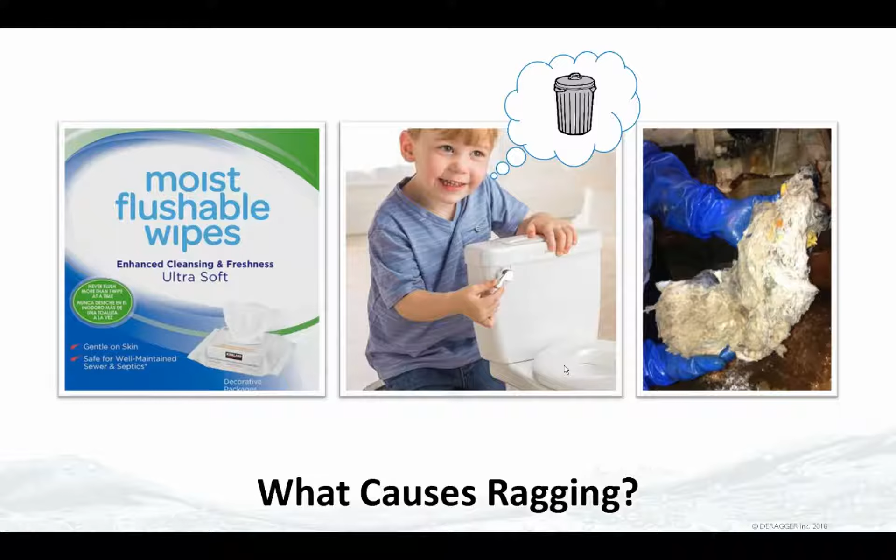So there's all kinds of things that can go in the toilet, but only certain things belong in the toilet. You know, I've heard people say the 3 Ps. I once asked my scout group that question. Of course, I had to bring wastewater into the scouts, and somebody chimed in and said, "There's a 4th P, and that's puke." So now I understand there's 4 Ps that belong in the toilet.

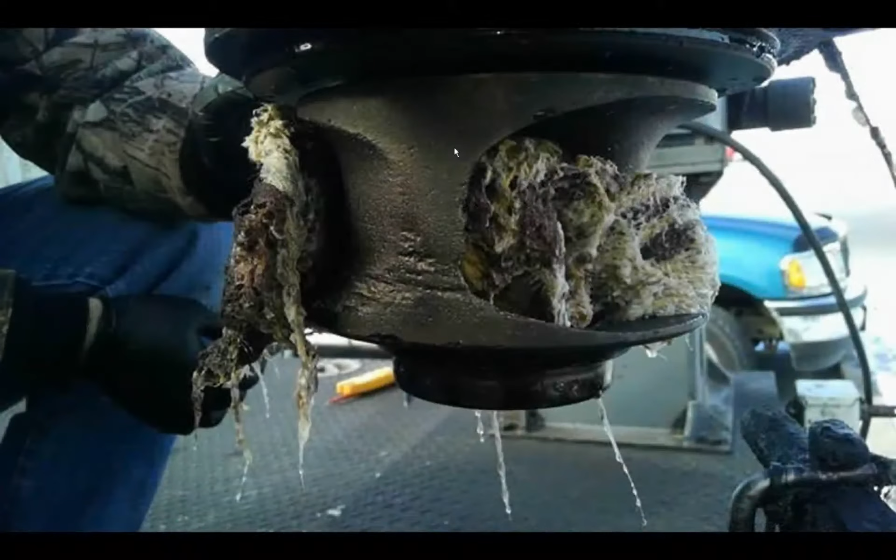So the impact of clogs. Many of you suffer the impact of clogs, be it clogging of the impellers, causing floods and surcharges, causing damaged motors and pumps. But the impact is clear. It isn't something that's nebulous and buried in the statistics. It's hard, it's real, people touch the impact.

One of the impacts that is hard to quantify for a lot of people is energy usage. Many agencies and districts don't track their energy usage in a pump station as they probably should. Pumps have been reported to be the #1 energy user in the USA. You're pumping water from rivers and creeks and power plants and water plants and wastewater plants. And any fraction of a percentage saved in the conveyance or pumping of water is a massive savings of energy.

An engineer might design a pump station to operate at 90 seconds, when in reality, because of the problems within the collection system, it may actually run for 3 times that amount of time, as well as drawing far more energy and pumping less because of clogs or head or another reason. So there's the ideal flow curve, and then there's the reality flow curve. And whatever you can do to change reality to give it an improved flow, the better.

So you might have, oh, there's my dog barking now. You might have $4,800 a year in pumping costs, and in reality, it'd be about $10,000.

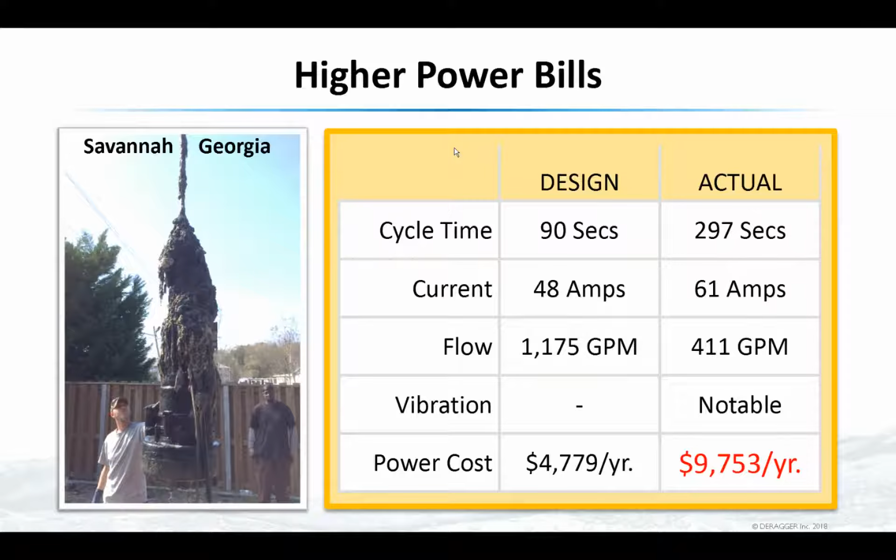Another dramatic effect of a ragged pump is the pump will not run smoothly when it is ragged up. It'll tend to be imbalanced, vibrate, draw more current and energy, and those have lasting effects such as making your windings heat up higher in temperature, and that'll reduce the life expectancy. Your bearings will require replacement more often, and your seals can actually leak prematurely, causing pump failure or worse, even motor failure.

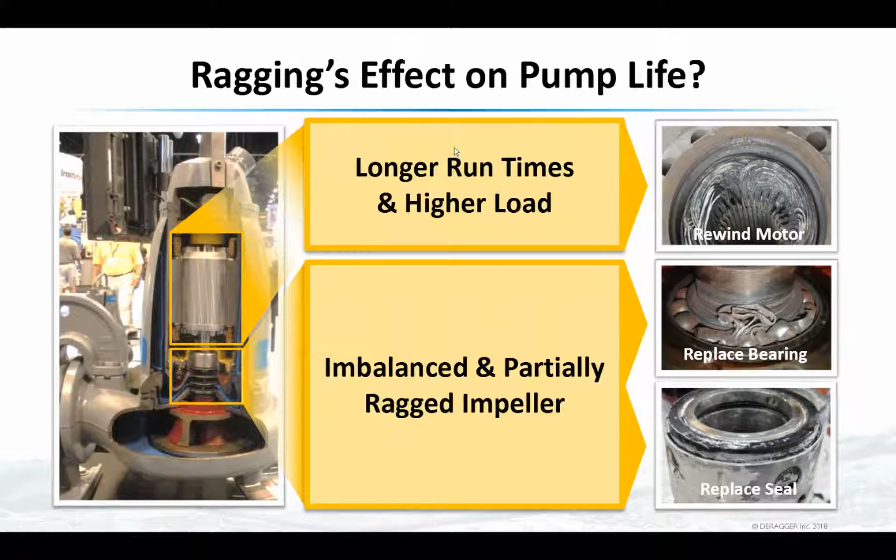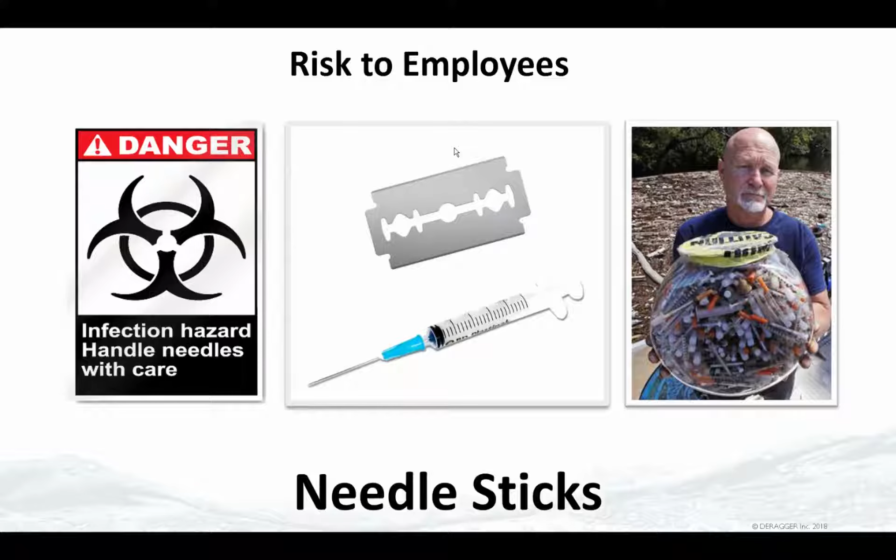Safety to your employees who are required to go out and clean a pump because it's not pumping efficiently. So needle sticks or other sharp objects are a danger. Physical injury, whether it's to a back, even stubbing your toe, dropping something or a wrench on your foot, let alone getting injured by the pump. So injuries are probably the highest risk factor as far as cost is concerned to having a clogged pump.

Biohazards. Well, we all know about biohazards. Hepatitis, and there are even studies that show that COVID-19 exists in the sewage, albeit at lower strengths. But biohazards of all types are in the sewer system, and collection systems guys know this. They don't need to be told this.

EPA and fines, and also damage to surrounding homes. You know, you have a leak, that's a problem. So the cost of repairing somebody's basement or first floor because of a pump leak can be very expensive, into the thousands, if not tens of thousands.

So where are you typically wasting money? Well, the biggest potential costs of having blockages could be injuries and lost time because somebody got hurt, fines, or costs to repair homes. And then we get into the man hours. You know, there's money associated with that, wasted energy, and then pumps and repair parts for those pumps. And at times, wasted energy can even be greater than the man hours, depending on the size of the pump and how much water is being pumped.

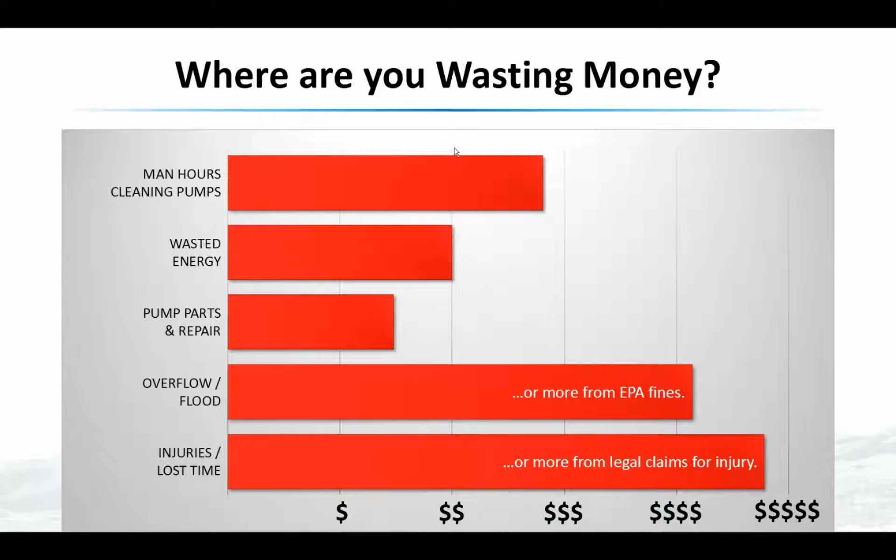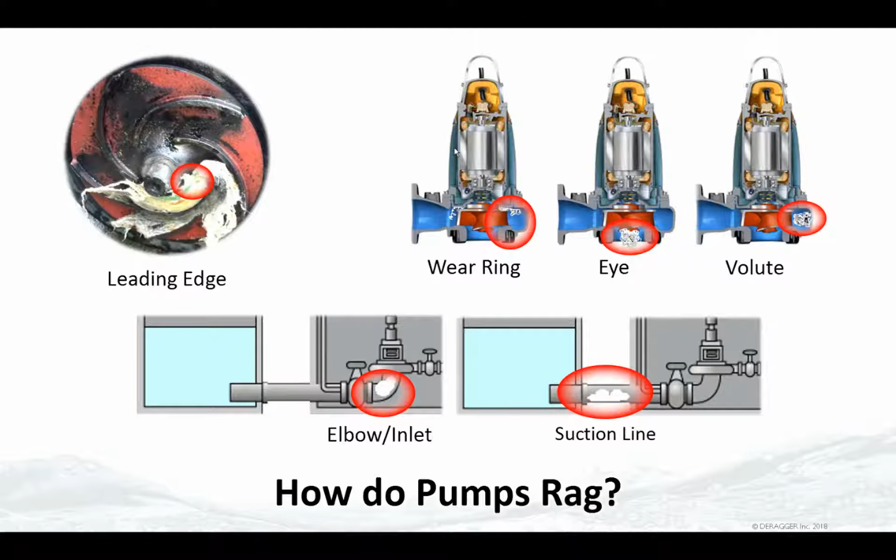So how do pumps rag? A number of different ways, and it's really where do pumps rag? In the wear ring, in the eye, in the volute, upstream, downstream. There's a number of places where a pump could rag up, or a clog could happen. You see the graphic there on the top left. It's essentially the leading edge will capture a rag and start capturing one, and then two, and then three, and then it goes on from there. So the idea here is that we want to prevent these things from happening like this.

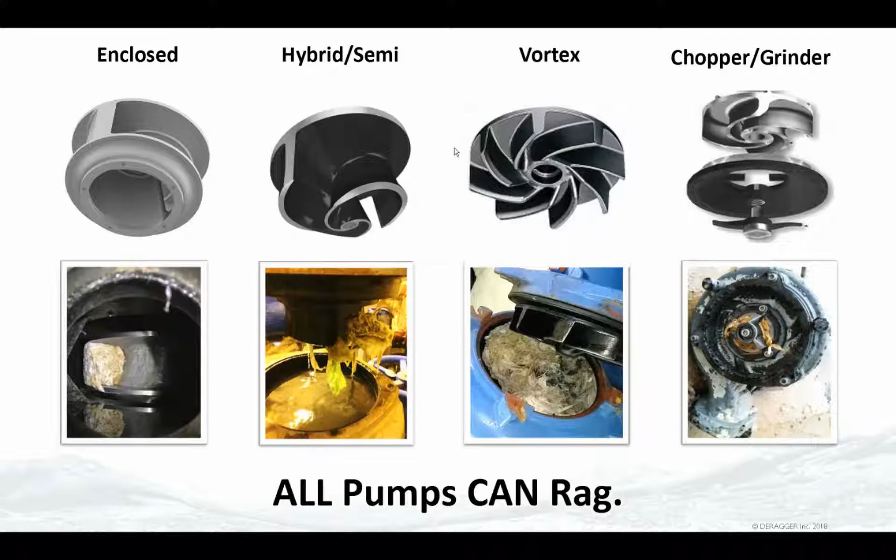So what types of pumps can rag? Every type of pump can rag. It depends on how much they rag, and as soon as they start ragging, they become inefficient. So a ragged pump is not an efficient pump.

Any questions? All right.

Let's keep going. All right, so what are your options? I painted a very sad picture of what could happen in your lift station and what probably does happen in some of your stations. You have a few options on what to do with that debris as it comes into a station. You can grind it. You can get all types of grinders to grind the debris before it gets to the pumps. You can change your pumps into a different style or a different blade or different impellers. Chopper pumps, for example. Or you can, what we say, pass the debris.

So you don't really necessarily need to get rid of the debris. You just force it through the pump in such a way where you're not causing a blockage, but you are allowing the debris to pass through a pump.

So a chopper pump or a grinder is a piece of hardware, which when the flow comes into a grinder, it macerates the material. So if a rock comes in there, it just grinds it, or a piece of wood, or sticks, or baby wipes, or whatever, and it's constantly running and grinding it up into small pieces. Similar to a chopper pump, it chops it into little bits and pieces, similar to the graphic at right. Essentially, it just grinds it up into little pieces, and it's easier to pass that way in those two options.

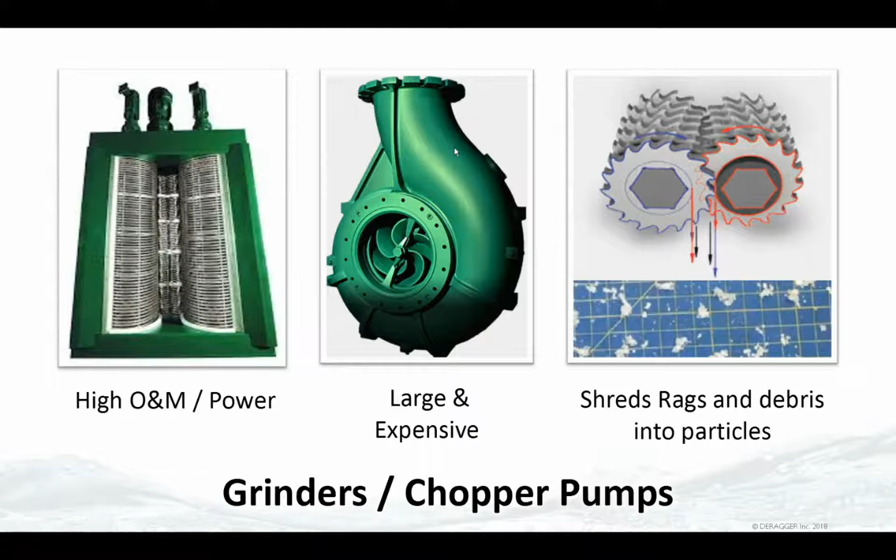So, but the result of grinding is it will grind it into small bits and pieces of pulp. And so what happens after cutting or grinding is it will end up going to the bar screens at the treatment plant, and it may not even get caught. It may even go through that, and then now you're affecting the process within the wastewater treatment plant.

Sure, the collection systems guys, they say, well, it's not on their problem list anymore of having debris in the pump station. They're running, but now the treatment plant is having to deal with these small particulates within the plant. So they often will pass through screens after being ground up into small little pieces.

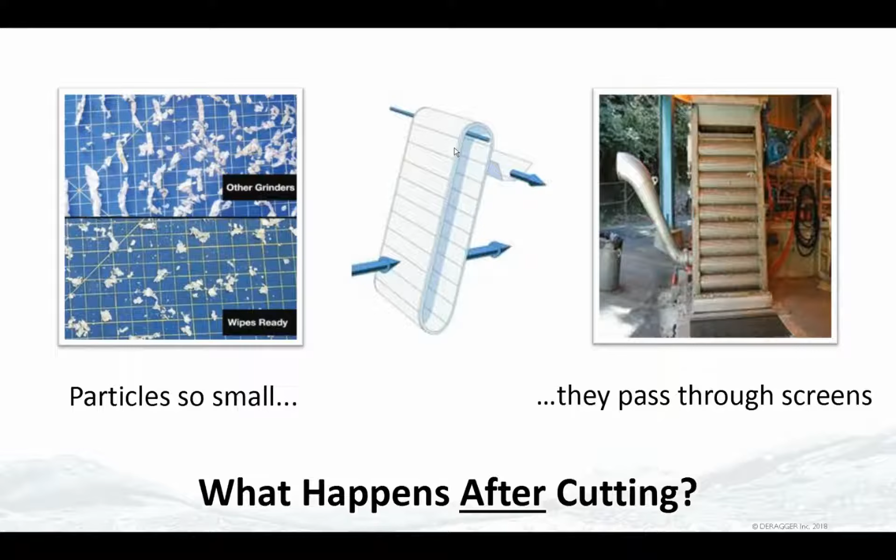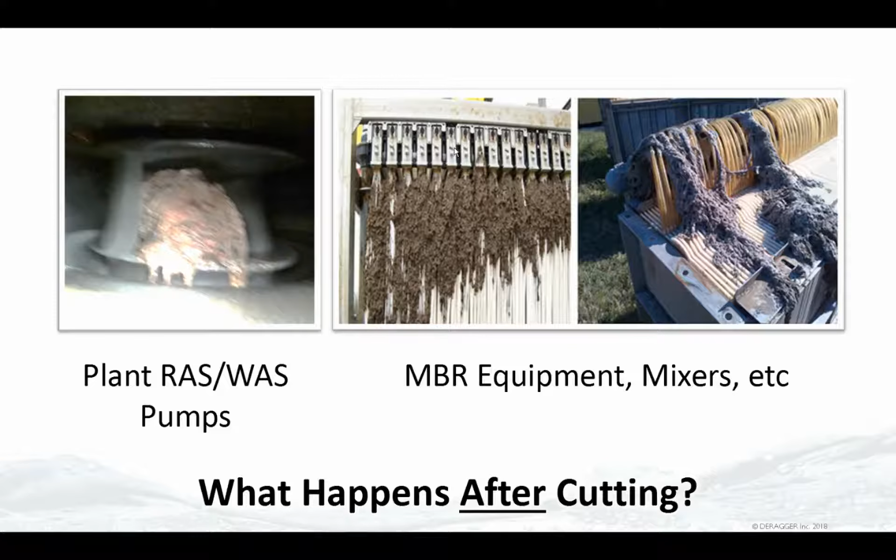And here's some graphical examples of what that looks like in the headworks of a treatment plant. It's sometimes mop-like, sometimes stringy, sometimes just like oatmeal. It will just pass through. So after cutting in the collection systems, you may or may not be able to grab some of this or collect it in the headworks.

The Deragger itself sits in the back of a panel and constantly monitors your pump for the potential of a blockage and initiates a cleaning sequence on startup when it detects that the pump might be clogged.

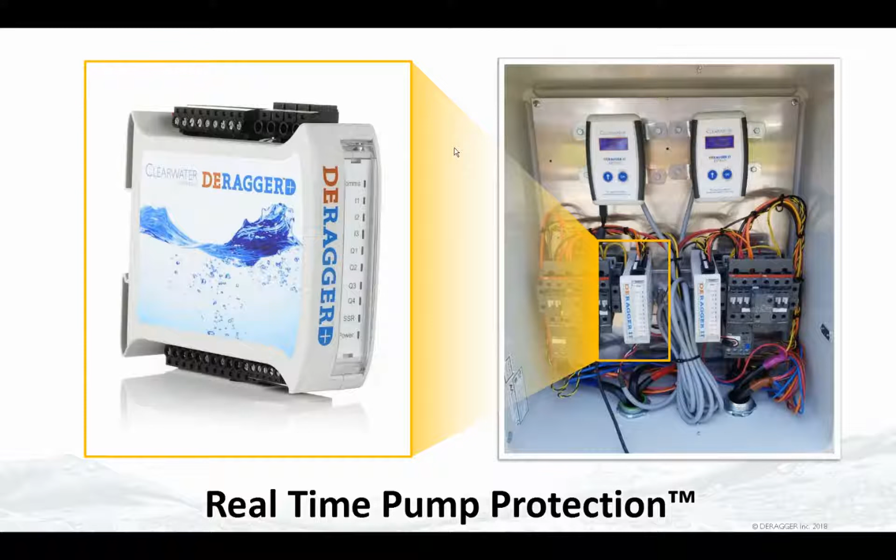So how does that work? So in real time, we measure the current and the voltage in a pump, and we calculate power on each of the three phases. So as we monitor the phases, we can make a determination as to whether the pump is clean or getting dirty. Now, just a quick note here, this only really works on three-phase pumps. There are some means of changing some pumps for this to work, but really a three-phase pump is where this device actually works best.

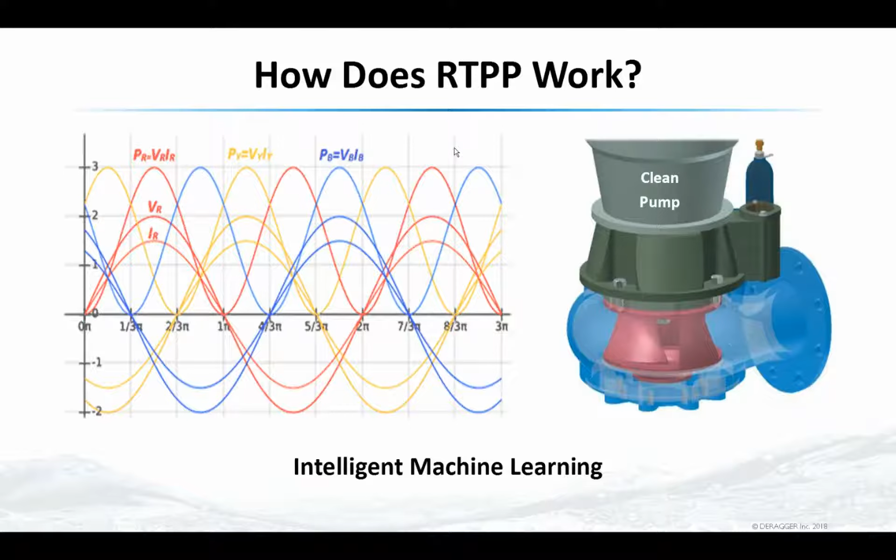So if your pump was linear and uniform, it would be pretty simple to say, hey, anytime my power goes over a certain level, let me know that there's a problem, or if my power gets reduced, let me know if there's a certain point. And it could alarm and trip and have some sort of action based on these two things. But in reality, that's not how a pump operates.

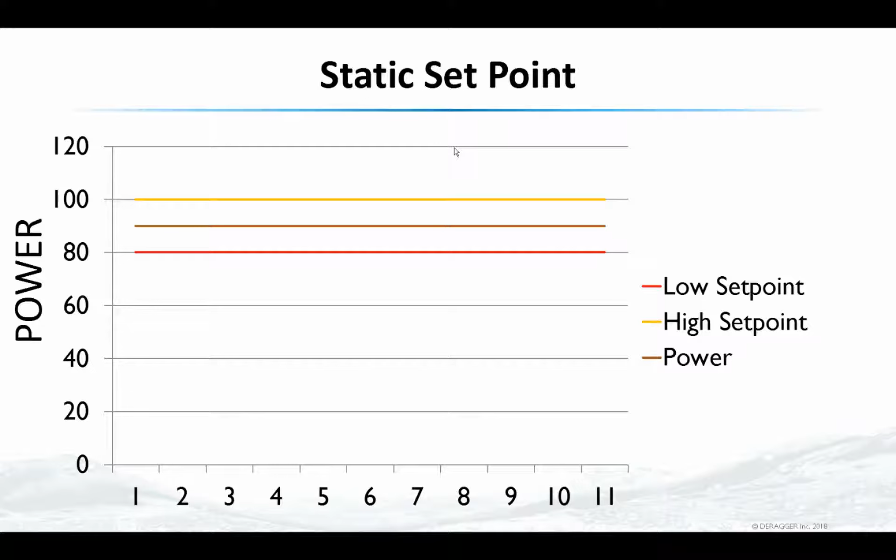A pump operates at different frequencies oftentimes with a variable frequency drive, or on startup and winding down also. So it's a little bit different in reality, and that's what's different about the Deragger product: it can actually calculate the power usage at different frequencies. So it's like having multiple set points at different parts throughout the range, and calculating whether the pump is in nominal, normal circumstances, or is above or below.

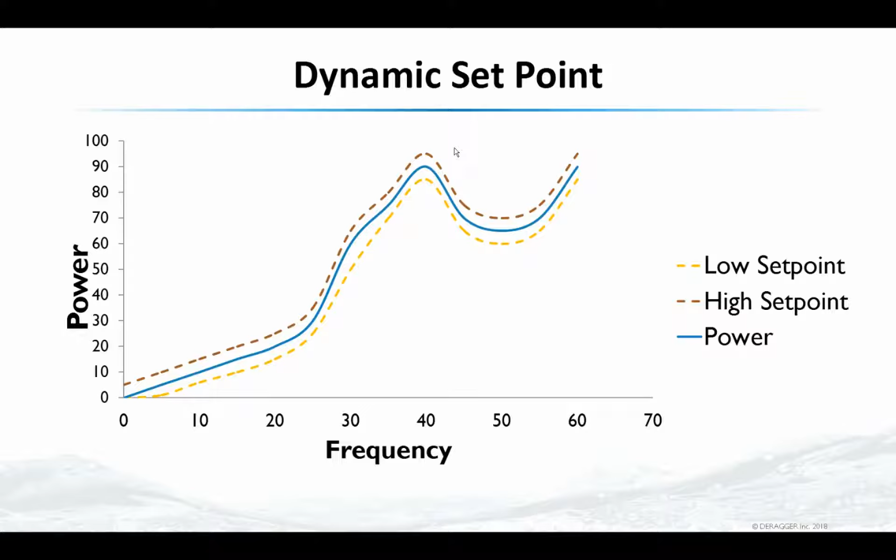So if the pump is just spinning in place, you might have low power requirements. And if it's clogged, your power usage is more. So the ability to measure torque and how much energy is actually used is key with this device over an entire range of frequencies.

So how does a clog happen with respect to the Deragger? What's the decision process, if you will? So a pump is told to turn on. The Deragger then monitors the power requirement and torque and determines whether it's within range or not. So if it senses that, oh, I have 1 or 2 or 3 baby wipes, just enough to get it to trip, it will then stop the pump, tell it to reverse for a couple seconds, stop the pump again, and go back and try pumping again.

If it finds that the torque and power usage is nominal and within the normal range, it goes back to what it was doing, and it's waiting for the next call of the pump to start. So it resumes in what's considered a clean operation. If it finds that it's still dirty or beyond the range, it will initiate another cleaning cycle up to a maximum that you choose for your station.

If it's not able to clean it, then it will trip an alarm, and your SCADA system will tell you, unable to clean this pump, somebody please come out here. And there could be something giant in there. It could be a 2x4 that it just can't pass, or a chain or something mechanical. What you don't want to do is keep trying to pump with a 2x4 stuck in your pump station.

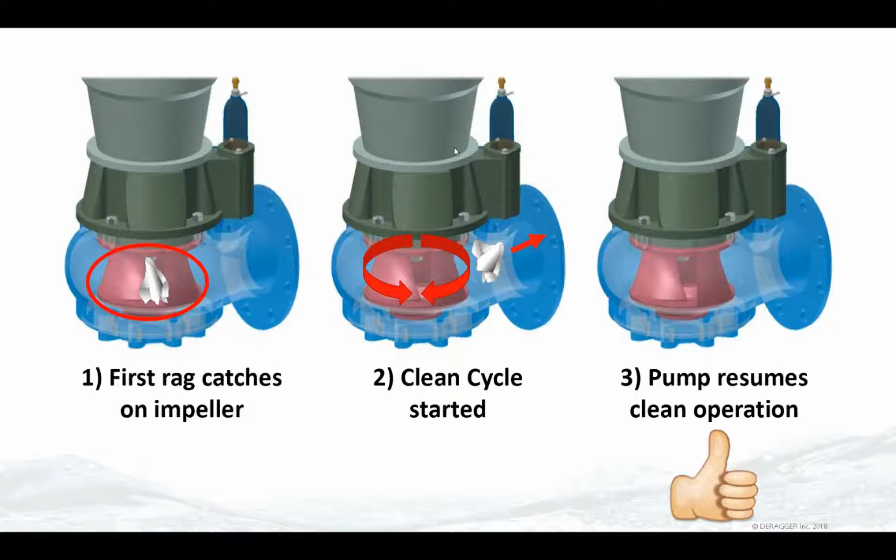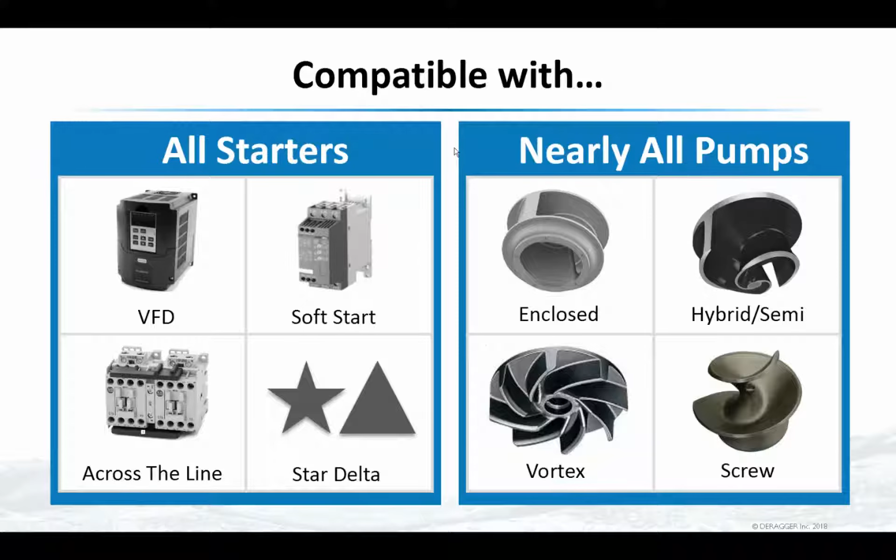So what is this device compatible with? The Deragger works with VFDs, soft starts, across the line, all types. In fact, I think it probably works best with a VFD myself. What kind of pumps? Just about any kind of pump: enclosed, hybrid pumps, screw pumps, chopper pumps as well, vortex pumps.

Now, some people ask, well, can I reverse my pump? Well, we have letters from a number of manufacturers who've shown that, yeah, you can reverse it, and this is what you need to do to ensure the safety and the integrity of the pump. It's been a long practice for a lot of old guys in the field to mechanically switch the wires around and temporarily reverse it just to clear out some blockages, and this does it automatically.

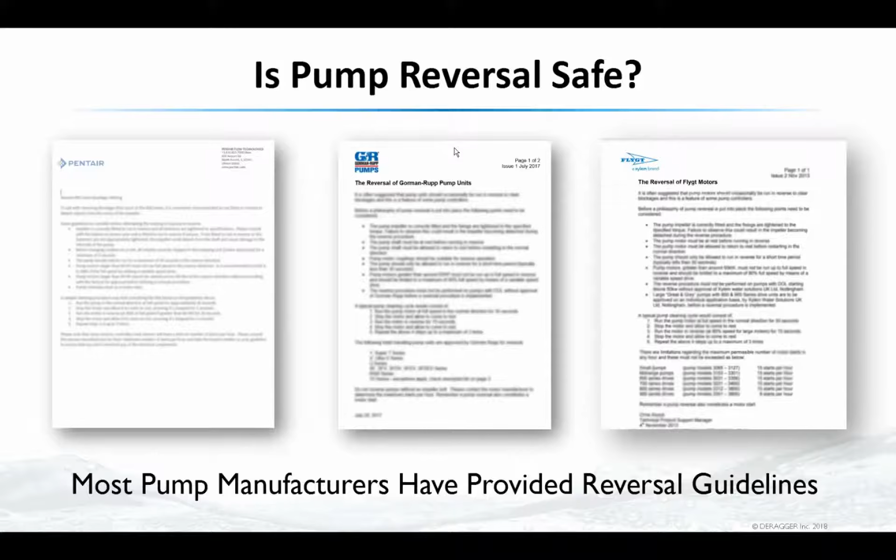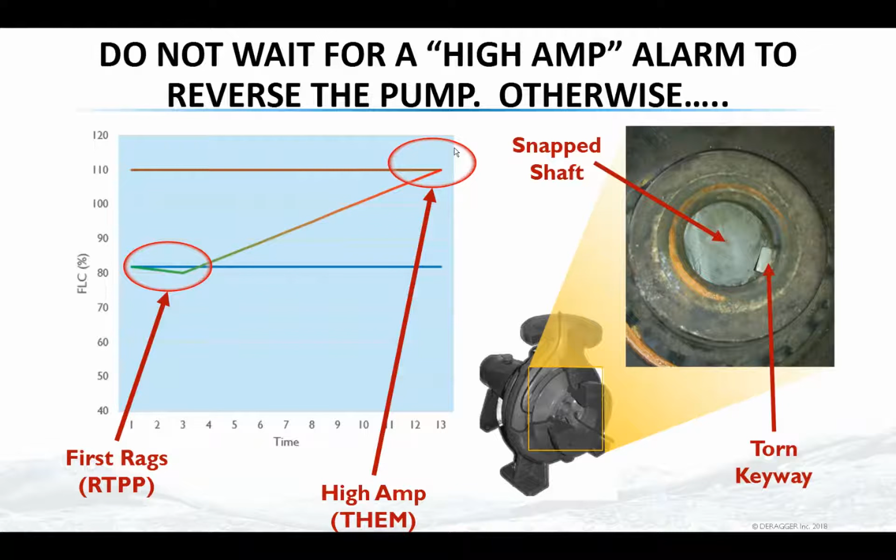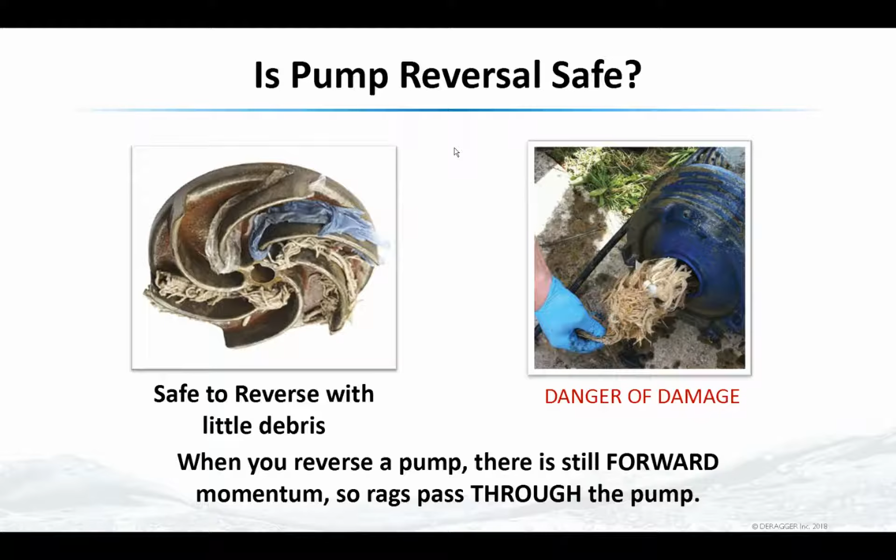So again, it's the same as the previous slide. You don't want to reverse a clogged pump. That's a problem. But before it gets clogged, with 1 or 2 wipes, then yeah, you can get away with that, but not at all when it's completely clogged.

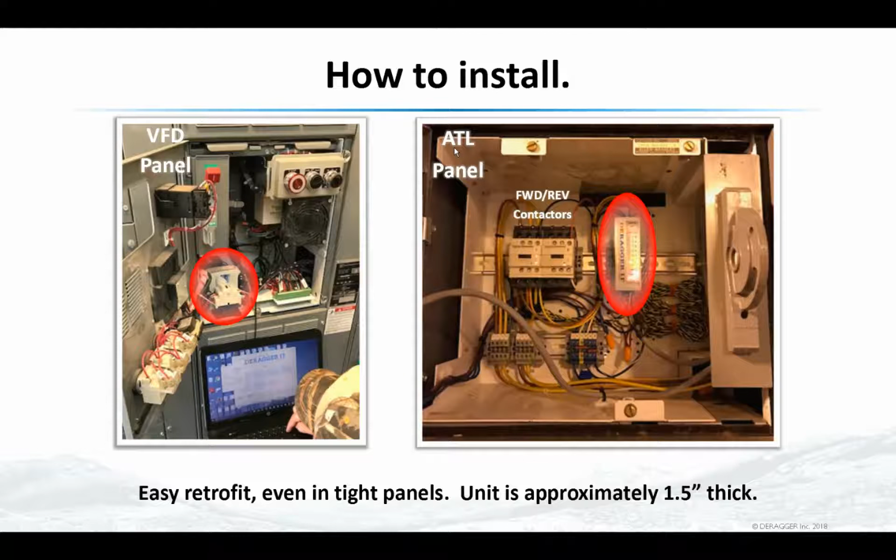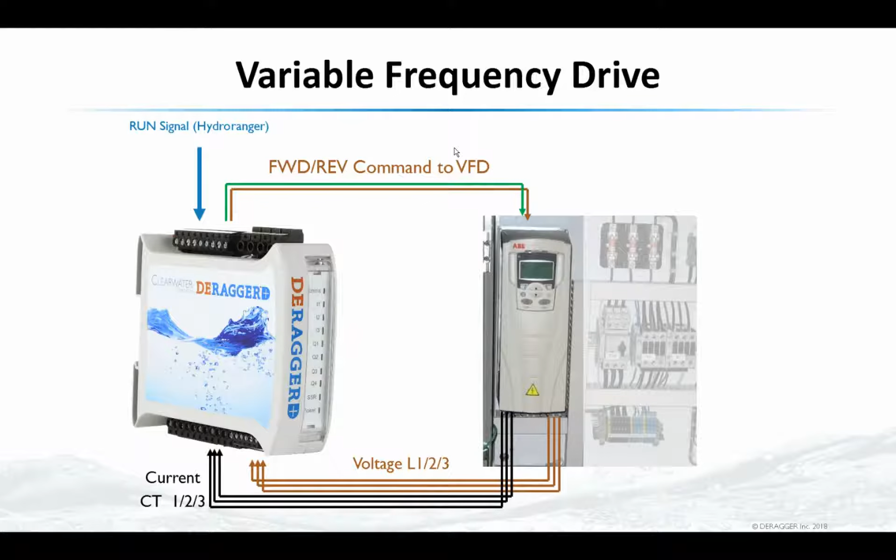So here's some of the wiring, if you will, for a VFD. Your run signal coming in from a device such as an ultrasonic, a surge pressure, a Hydroranger, will tell the Deragger instead of the VFD to start the pump. The Deragger then tells the VFD to start it, and if it finds that the current and voltage and calculated power is not within the normal range, it will tell the VFD to go into reverse for a second and then go back to normal operation. So this is really simple wiring on how to do the VFD.

Across the line is a little bit different because you do have to add a secondary starter for the motor. And you need to have a little bit of space, or a lot of space, depending on the size of your motors, in your bucket to do this. You may have to have a panel on the side of it, but the gist is the same depending on horsepower. They all get wired the same. Signal comes in to the Deragger, tells which starter to start, whether it feels it's clogged or it needs to go in reverse, or just normal operation.

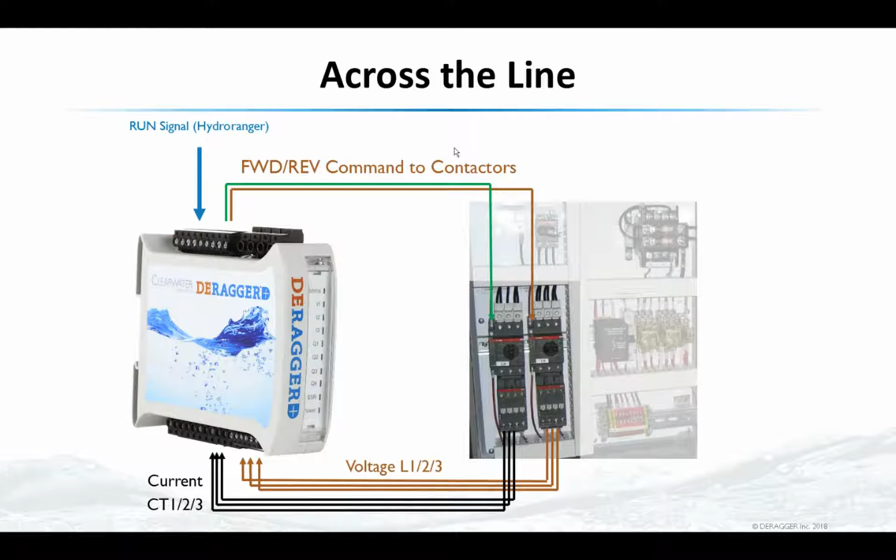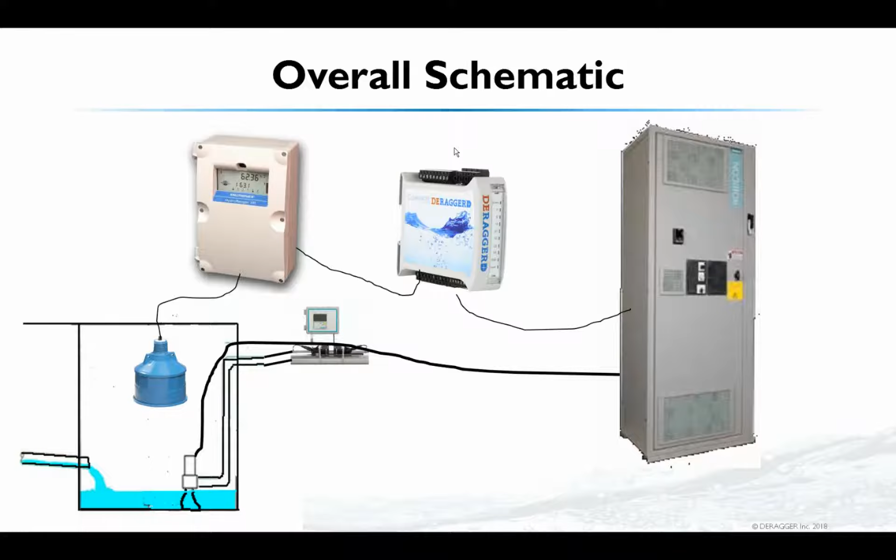I'll stop here for any questions. If anybody has any questions on that. It's all quiet. Is everyone in a lunch coma?

Okay, we'll keep going. So what do you get with a package? You get the software, you get the Deragger, and you get a keypad. And the benefit of all this is not only do you have the deragging capabilities, you have the ability to log and save all of the data, such as run times, how many times it had to initiate a cleaning sequence. You have your ability to track energy usage in kilowatt hours. So now you have on a memory card, or the ability to download memory into a laptop, your full functionality. It also has a USB port so that you can download data via the USB cable into the software.

Oh, did somebody have a question? All right, never mind.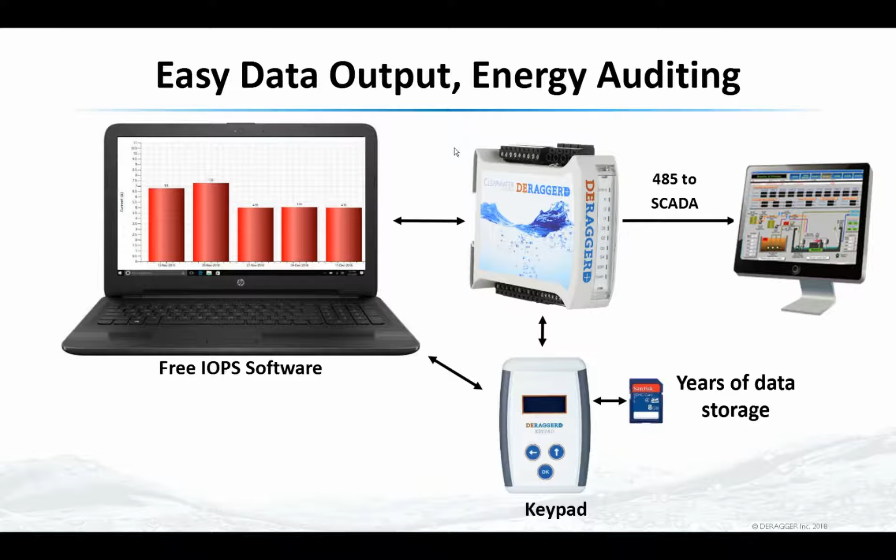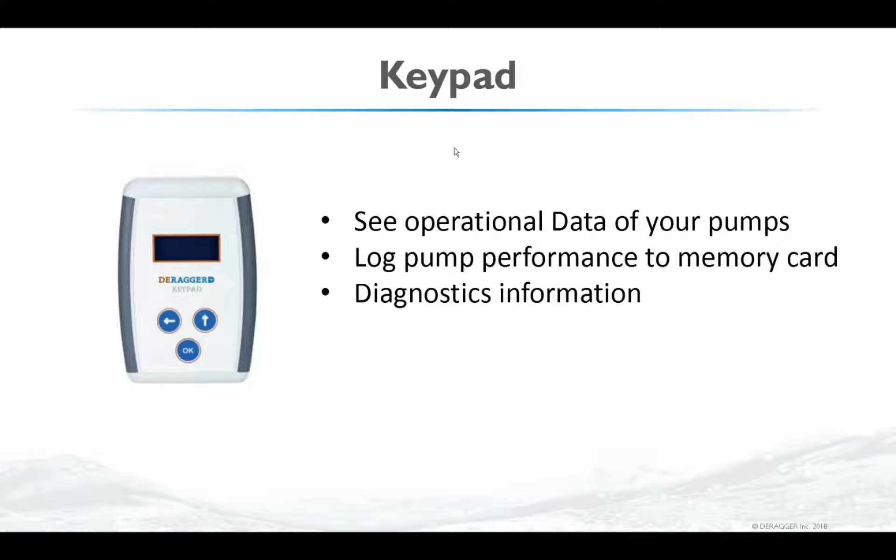The keypad has a number of functions. You can see the operational data of your pumps, starts, stops, how many times it had to do a pump cleaning cycle, energy usage, and any diagnostics information. So this sits on the dead panel in the front, so you don't have to access the electronics in the back.

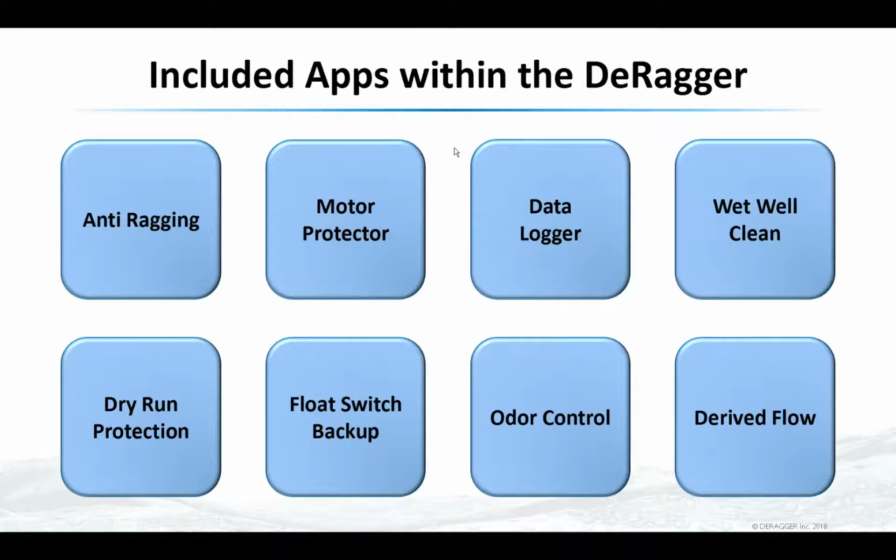Included within the DeRagger are what we call apps. And there's a number of functions with these apps. Anti-ragging is the standard default for the basic Deragger. Motor protector, data logging, wet well clean cycle, dry run protection, float switch, odor control, and what we call derived flow. So it can actually calculate flow on non-VFD applications, as it's pumping up and down. So what are some of these things? I won't read this verbatim, but anti-ragging is the functionality of keeping the pump clean. Energy monitoring and data logging allows you to track your voltage and current and power on each of the phases and energy consumption. Motor protection: overload, imbalance, overcurrent, undercurrent. Built-in data logger.

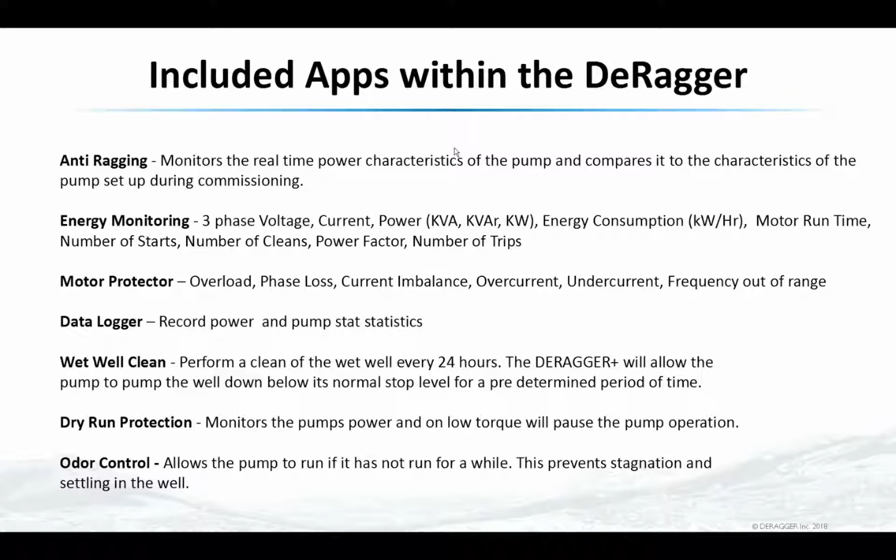Wet well clean is to pump down the wet well below a certain level. Let's just say every 24 hours at midnight you want to tell it to pump down to 10 seconds beyond the set point. It'll do that. Dry run protection to prevent an operator from leaving it in run and then just driving off. And then odor control for those stations that maybe don't pump very often, over the weekend as an example, and you don't want it to stink, so it will pump out whether there's a high set point or not. It'll pump it down to try to eliminate some of the potential for septic water.

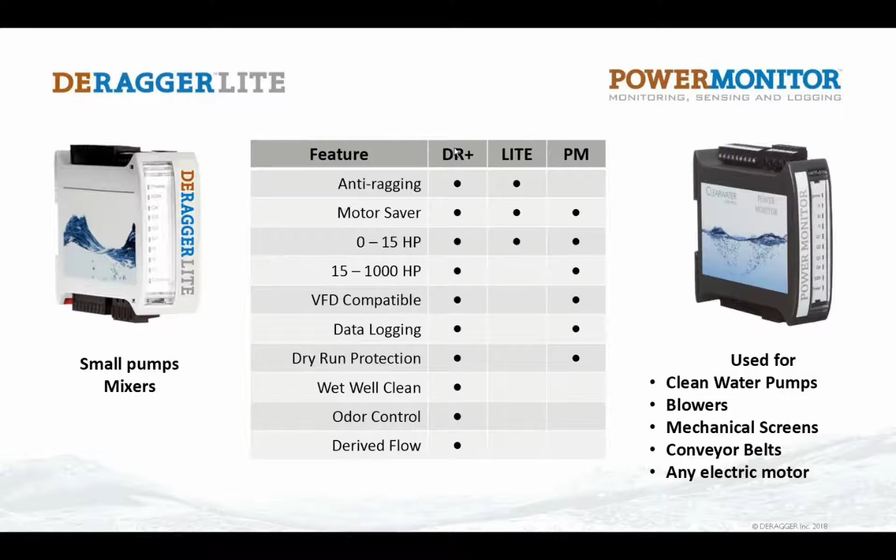So there's three models of the DeRagger. There's the DeRagger Plus, the Lite, and the Power Monitor. The Deragger is the full-blown unit for all horsepowers and all of the apps, if you will, built into the unit. The Lite is for the smaller pumps and doesn't include VFDs or data logging or any of those features. And if you don't have any ragging problems and you purely want to just use it for doing power monitoring, we have the PM version, the Power Monitor.

Okay, so we have a question here. If the VFD is using communication network type commands for run stop, then does this support industrial network protocols like Ethernet IP, field bus, etc.? Jordan, you want to chime in? Yeah, so it needs a hardwired run signal to be able to tell the DeRagger to start and stop. There are some ways around it.

Sorry, my dog's acting like a lunatic.

But yeah, so we do have the capability of talking Modbus TCP, but still, for the DeRagger to receive a run signal, it needs to be a hardwired run signal instead of, say, Ethernet IP or something like that. That makes sense. Do we read the current and voltage from the VFD via communication protocol, or strictly the CTs in a connection? For the DeRagger, it's reading directly from the CTs, not the VFD.

Okay, so I guess the question is to communicate or tell the commands for run stop. It's really just a 4 to 20 signal to the drive. Is that correct? So the way it works is, like if you're connected to a Hydro Ranger, it's going to send the output from the Hydro Ranger to the input of the DeRagger. Same thing with a PLC. It's a digital signal, not an analog signal. But it needs to be a hardwired signal. What tells the VFD to go at a particular speed?

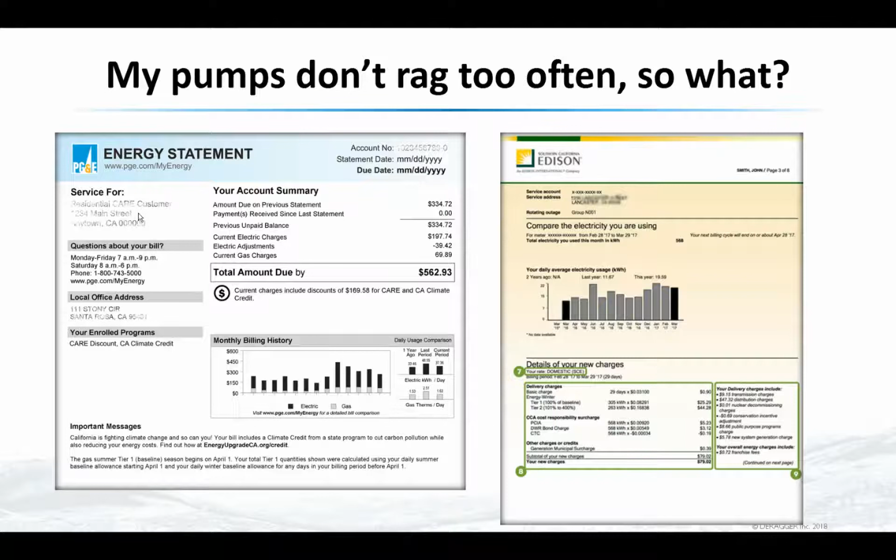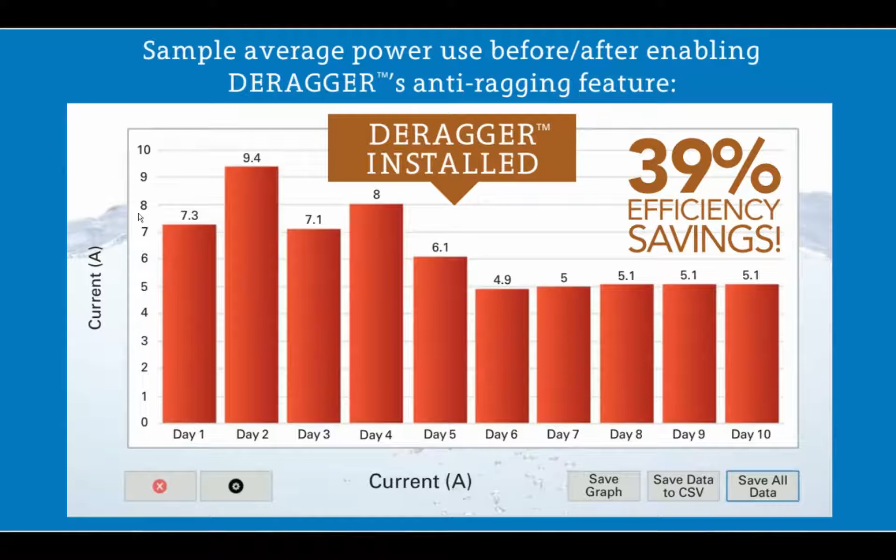So this is a graph showing a sample power usage before and after the DeRagger has been installed. Before it gets installed, you have an up and down cycle for energy usage, or current really, which equates to energy usage in a pump station. It goes up and down depending on the clog situation of the pump. And it gets completely smoothed out with the DeRagger installed because it's constantly monitoring and dealing with it at that particular time. So is this the holy grail that we found? For many stations, it actually can be, or the gauntlet, I should say.

So we have a question. Will the DeRagger work if you're using a single-phase 240 volts and a VFD to utilize a three-phase motor? Jordan? Yes, sir, it will. That's normally what everyone does. If they've got a single-phase system, they'll put a VFD in, change the motor to a three-phase motor and pump, and the DeRagger works great that way.

All right, thank you. All right, so the Holy Grail. What do I call the Holy Grail here? The Holy Grail is essentially now you're getting an efficiency on your pump station. This is really what everyone should strive for. It's like driving, I like to say, your Prius down the street. You now have a dashboard that gives you miles per gallon in graphical trend format. And there's this psychological thing that happens that you say, oh, let me see if I can get 48 miles per gallon. Let me see if I can get 49 miles per gallon. So you start operating your station or your car in a more efficient manner.

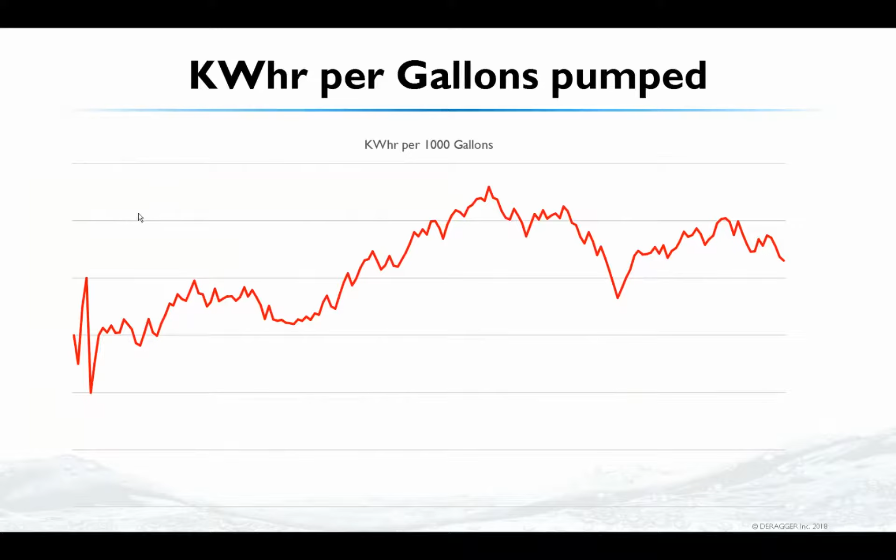So if you see in a graph of historical data or on SCADA your efficiency or kilowatt usage go up for the unit number of gallons being pumped, you know there's a problem in your station if the energy usage is suddenly going up. So being able to track the energy, I think, is key on some of this, to know from a maintenance perspective that you have a problem in your station or not.

So here's a couple of case studies that we have that I pulled up. They're both in California. This one is in Los Angeles, and it's for two 50 horsepower pumps. They suffered from pumps being ragged up, and they had to send crews out maybe a couple times a month, 4 times a month, multiple crews. These are pretty good-sized pumps. The risk is for lifting the pumps. Of course, there's the bio risk and sharps, and just getting hurt. And also, energy consumption was more taxing on the motor than if it was clean.

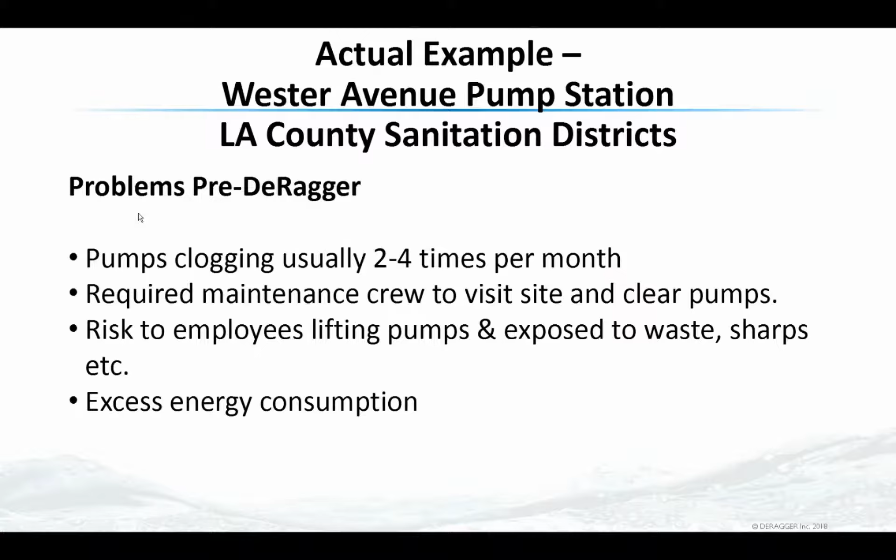So the results of this station was that after installing it, they haven't had to clean the pump in over 4 years. Now, this graphic is old, so I would say this is probably more like 6 years or maybe even 7 years. The energy savings, I would say, is actually nominal. It's crazy that you would say 4.5% is nominal, but that's pretty low in the scheme of things. But it does happen.

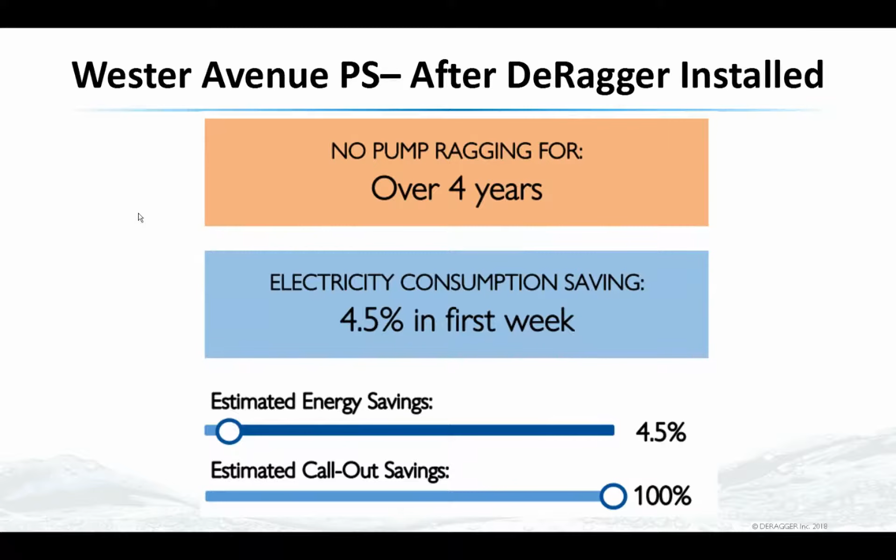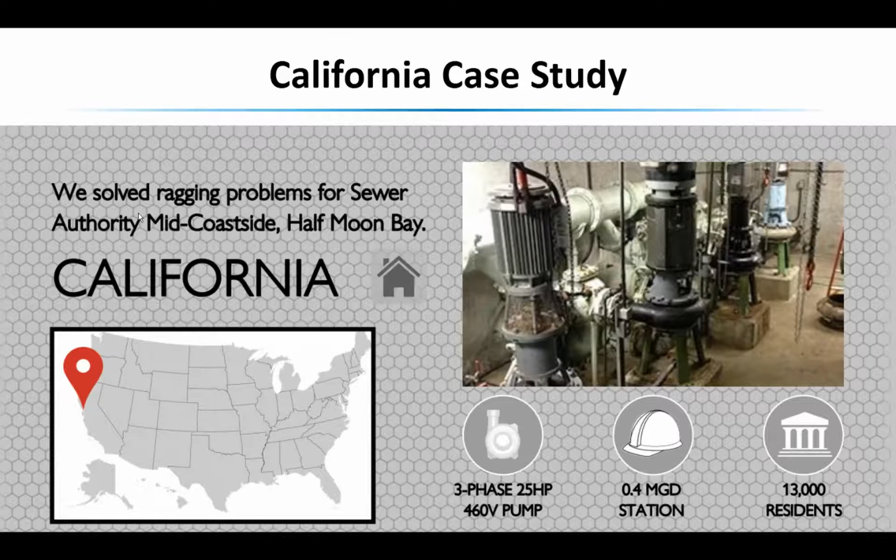Another case study is something in my neighborhood, actually, in Northern California. This is a 3-phase 25 horsepower pump 460 volts, and it's not a big station in the scheme of things, about a half MGD. But I personally saw the flow meter after the pump is cleaned. The mag meter that they have on the wall said 0.8 MGD when it was running, and 4 or 5 days later, it said 0.45 MGD. So it was a massive change in the efficiency of the pump itself.

Their problem was that it would clog twice a week, and they had to send a collections guy, just one. It took him about an hour at a time to clean it out. You know, he was exposed to having to lift the pumps, the potential for sharps, and then the energy consumption as well.

So I see a question, and my little puppy is barking.

Okay, let me read off the question here. I think my rags are collecting in my wet well and then get sucked up by my pump in the pump station next to the wet well. So we get an instantly clogged impeller. Will that be a problem reversing the pump at that time? So the debris builds up and then gets sucked up. Jason? Jason?

You know, when it starts to collect rags, if it can catch it pretty quick, it's not going to be a massive rag ball like some of the pictures you've seen. So normally it's okay to reverse it so it'll clean itself, and you could probably do it a thousand times with a massive rag ball in there, and it probably wouldn't hurt anything. But that 1,001 time, it could tear something up. So you are walking a fine line with something like that.

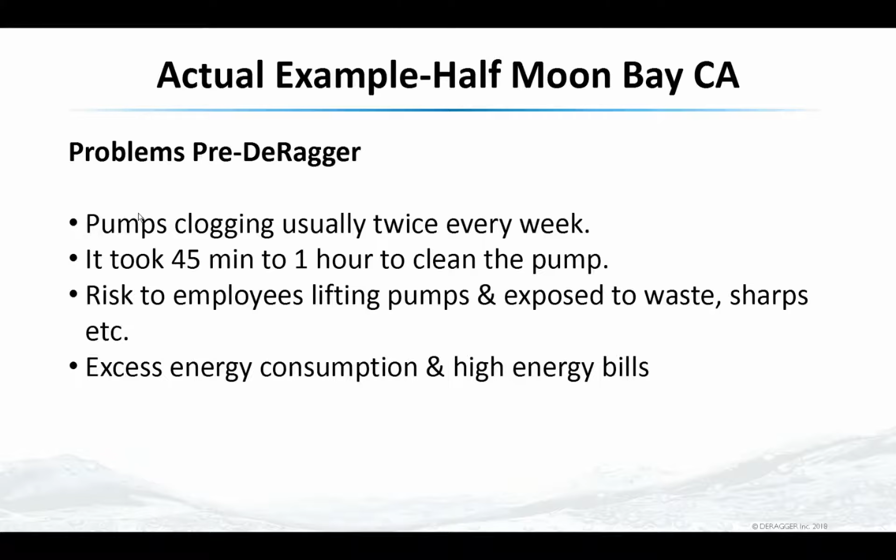You haven't seen the results of the next page, if you will. So I'll change the slide. So Half Moon Bay had 19% improvement. Would you see 19% improvement on a station with 5 to 8 MGD? Jordan, do you have any examples of a big station like that and big improvements in energy?

I don't remember. I know there's some on the website where we have had some really big improvements. I know some of them, the larger pumps, you're going to see a lot bigger improvement than you will on the smaller pumps. And some of them, we've seen up to 80% savings. And we've got that documented in some of the case studies online. I don't remember which one, but if you look through them, there is one in there. It's been amazing.

Yeah, so I think dollar-wise, you're going to see a big improvement. But as far as a percentage, I'm not sure if you're going to see 80%, but your dollar-wise is still there. So the cost of the DeRagger for a 200 horsepower pump is the same as on a 20 horsepower pump. So if you're saving on this example $500 a month in PG&E bills, that's a lot of money for this small station, but it may not be a lot of money for a bigger station. But if you're saving 19% or even 10% on a big station, that's going to be a bigger dollar amount for those larger stations. So I don't know if you're going to see the dramatic percentage improvements, but you should see dollar improvements that are quite large.

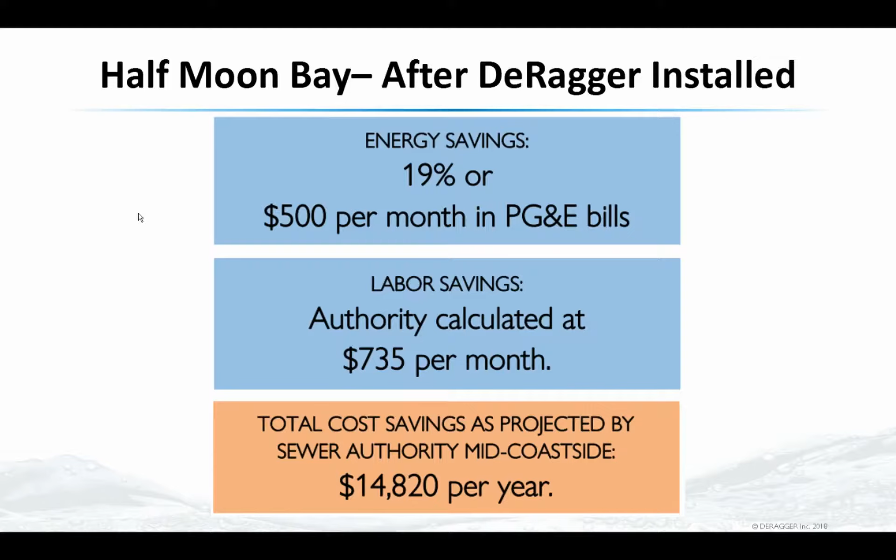But in this case of Half Moon Bay, their bills between July and August were a difference of about 19%. And that's a good month to do a test in because there was completely dry weather flows and comparable as far as non-school. Looking instead at November to December would be a little tougher because of the potential for wet weather. Their labor savings alone for the 6 or 8 trips out there worked out to be about $735 a month. And these are not numbers that we calculated. These were calculated by the agency. So they wanted to see what their ROI was, and they came up with about a $15,000 savings per year for just this one pump.

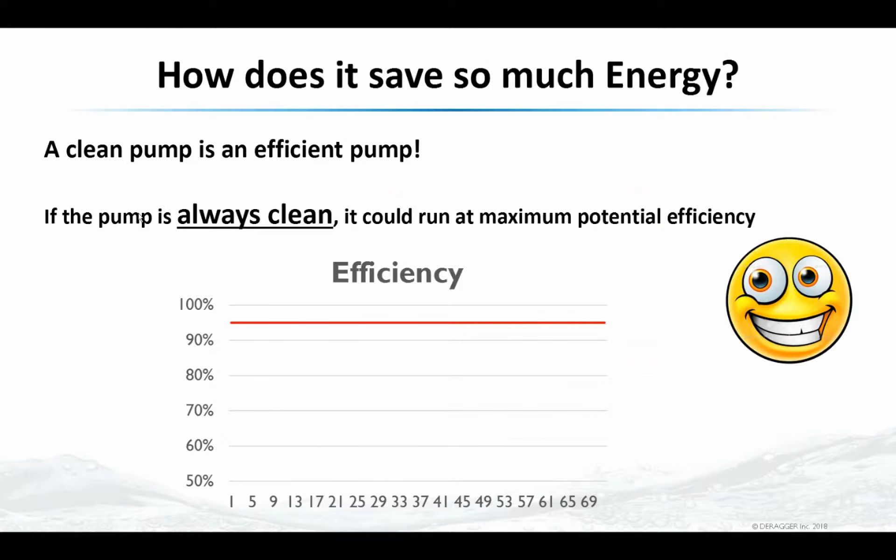So how does it save all this energy? If your pump was always clean, as you see here, you'd be running at a constant efficiency. You wouldn't have dips in your efficiency because there are no clogs. But in reality, you do have the potential for clogs, whether you know it or not. Many clogs will actually clear without any interference by you. And so you have this constant sawtooth graph of efficiency. Very high when it's clean, and as soon as you drive off, it goes down and lower and lower, and then you get back there and you clean it again, in the same cycle every week, every month, every 2 months. So your net average goes pretty low. Instead of operating in the 90s, you could be in the 70s as far as your efficiency is concerned.

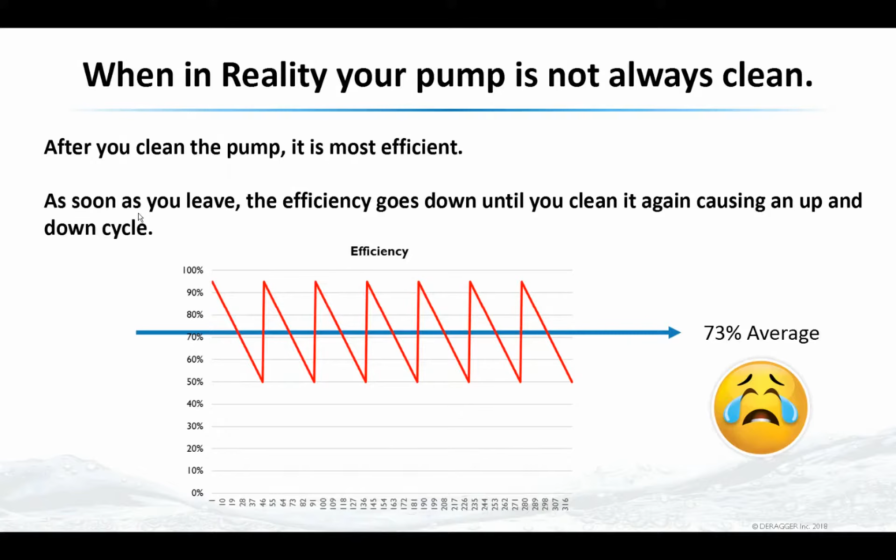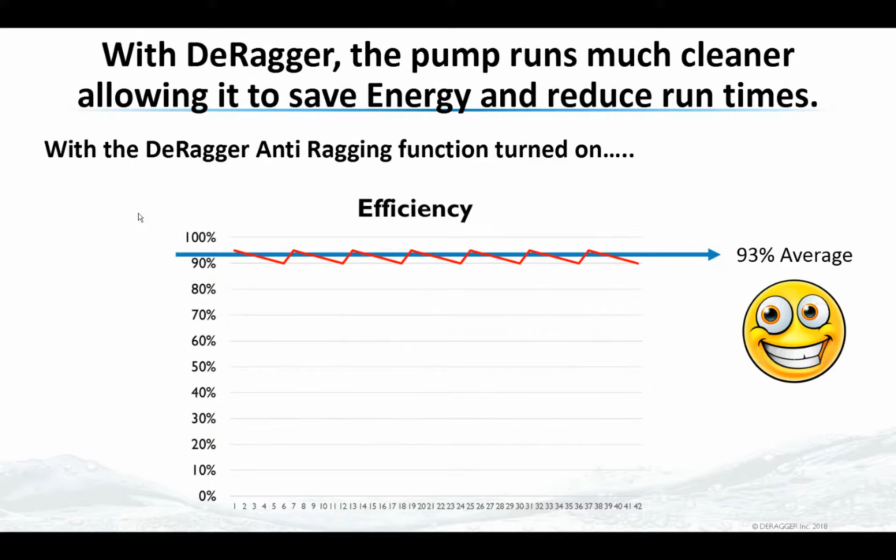The DeRagger instead uses real-time protection. So instead of you reacting to an alarm a couple weeks down the road, it senses something right away and initiates the cleaning cycle. So you do have a sawtooth pattern. It's just very small, and it keeps the efficiency higher. And so this is where we gain in the energy savings. Your pump is running more efficiently than when you don't have it cleaned up.

You know, if you actually do a Google search for Deragger and look up videos, you're going to find quite a bit of news reports, be it CBS, ABC, Fox. They're going to have news reports in towns throughout the U.S. where they've had clogs, and they've actually told the news people that they installed the DeRagger and have not had problems since. So it's kind of interesting watching the product on the network news as well.

So in summary, what do you get with this product? You save on energy costs, save on your labor costs, your reduced pump times because it's more efficient, and reduced times make your pumps last longer. You reduce vibration because of a dirty pump, again, making your pumps last longer. And now you get to track the efficiency of your station to calculate gallons per kilowatt hour.

So there's no need to install a grinder. That takes engineering costs to figure out where to put it. It takes more energy, ironically, so you're going to add to your electric bill. And of course, buying a new pump is an option, but you could get into the tens of thousands to buy a new pump, and it's still not going to have the efficiency of keeping itself clean all the time. So there's some drawbacks to all that.

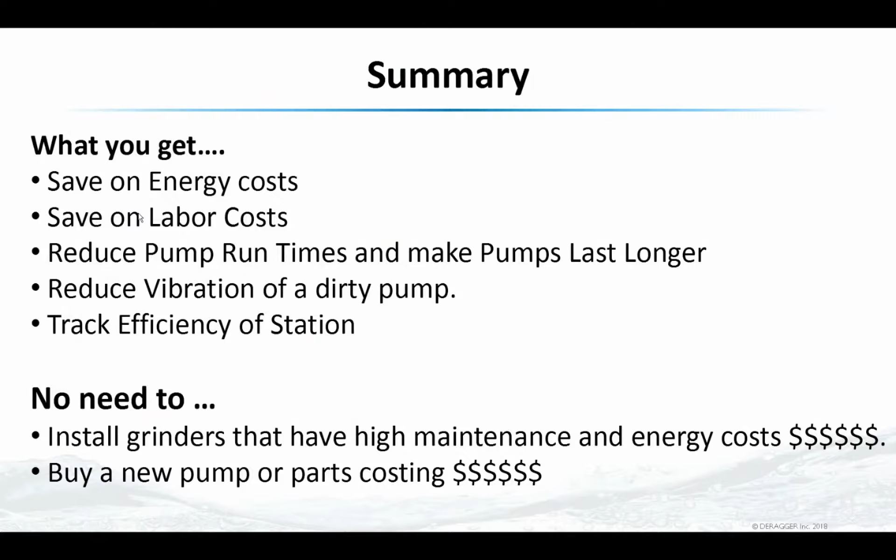So again, the options that you have: expensive to install a grinder or a macerator, expensive to install a chopper pump. There are some self-reversing pumps out there, but they're not really monitoring throughout the range of the frequency and speed. That is a patented item. And then there's the cost of the deragger. It's quite small, relatively speaking. So what is the cost of the deragger? Instead of hiding that from you, I'll show it to you.

So the deragger is about $5,500 for the device, and you get the current transformers with it, you get the keypad, and all associated cables and fuses that belong to it. All you have to do is install it. We provide the software as well. It gets configured, and we can even provide installation assistance or startup. And it's been installed by districts directly or by service providers such as Tesco or Telstar or similar integrators as well. The LITE version for smaller stations and smaller pumps is a couple thousand dollars less.

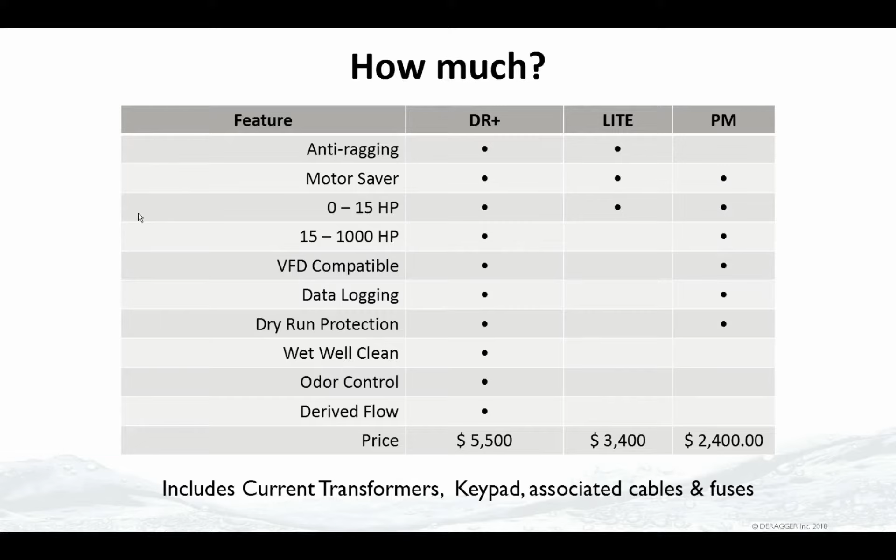And if all you need to do is measure energy, it's even lower than that. It's only $2,400. That requires very little installation if you're just doing energy, because you're not having to do any controls with that. So that's the deragger in a nutshell. Is it the end of ragging? There's always going to be something that can clog a pump. But for the most part, I think most stations will benefit greatly from something such as this product.

Any questions? Any more questions? The average installation costs. That varies on where it is, of course.

Some quotes here. Marty, let's see here. Can we unmute Marty, perhaps? Let's give it a second. Of course, I assume Marty's on the line. He is. I just set him allowed to talk. In any case, there might be an issue with his mic. I see something about an error in using the microphone.

All right. On a typical application, it takes a day. In a typical application, if you had to install a reversing contactor, that adds some money to it because you have to pay for the reversing contactor. So it really depends on the installation. But I would say it's probably $1,500 to $2,500, depending on the site. That would be a typical installation cost if you're not going to do it yourself.